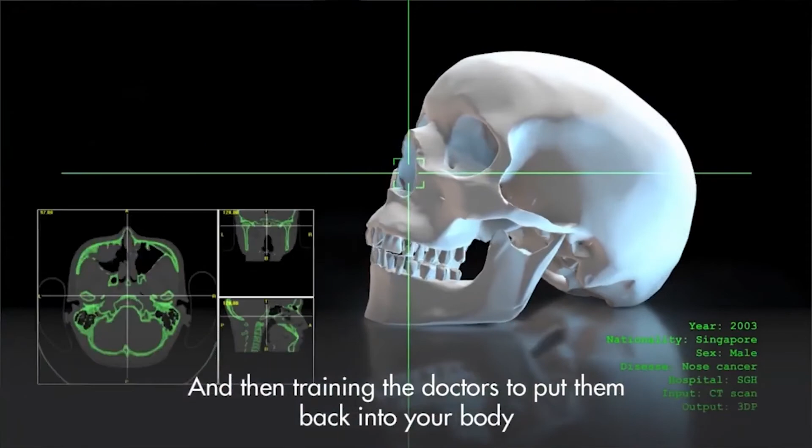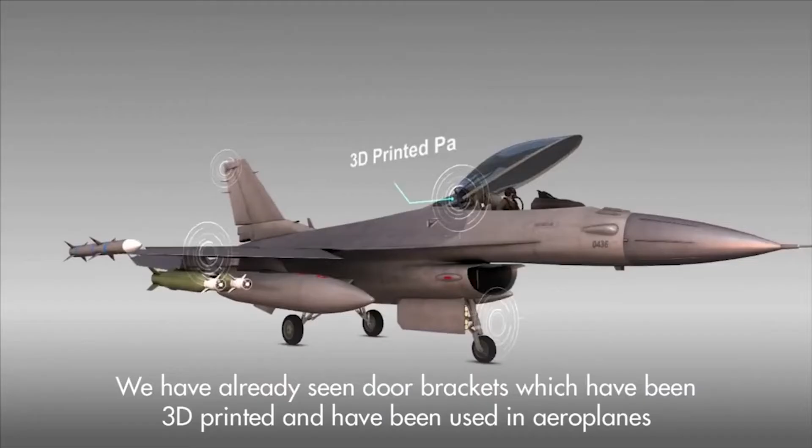AM can be used to make injection molds with conformal cooling channels, as well as low-volume customized jigs and fixtures. We have already seen door brackets which have been 3D printed and used in airplanes. We will also see fuel nozzles that will be used in aircraft engines.

So an exciting development is the development of hybrid technologies. This is a combination of both additive and subtractive-based technologies, such as milling.

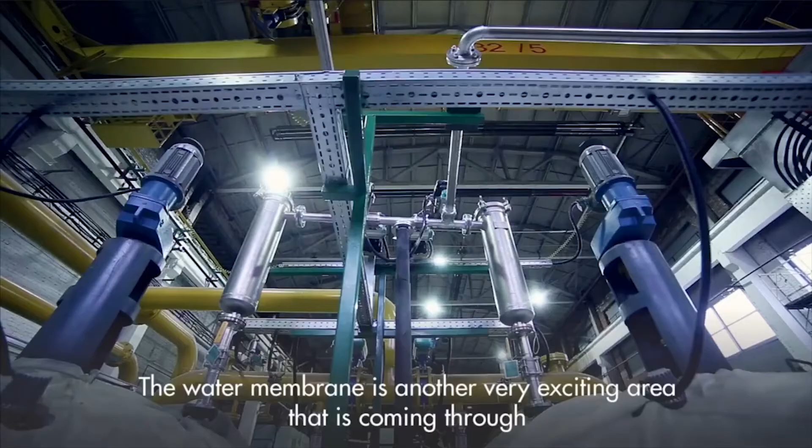Solar panel and wind turbine are some of the emerging applications with AM in the clean technology sector. The water membrane is another very exciting area that's coming through.

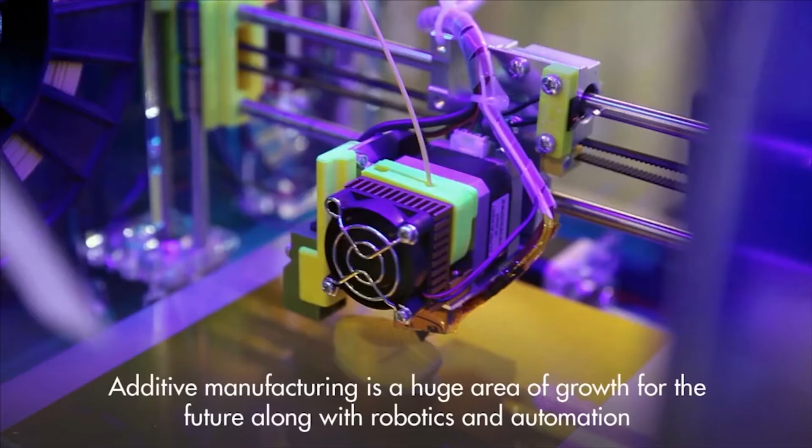Additive manufacturing is a huge area of growth for the future, along with robotics and automation. In Budget 2016, the government announced the Industry Transformation Program. Additive manufacturing, automation, sensors, analytics - these will be the enablers.

AM is identified as a disruptive technology. It has the power to impact lives, businesses, and the global economy. It is a game changer. The current market size is about 7 billion, and we should see this number triple by the year 2020 to 21 billion.

The AM ecosystem, as we see it, is made out of three main parts: universities that are training students for working in the 3D industries and do research; corporations that do prototyping work, actual parts, and scale-down models to train people; and individuals that take advantage of the fact that 3D printing can do small quantity productions.

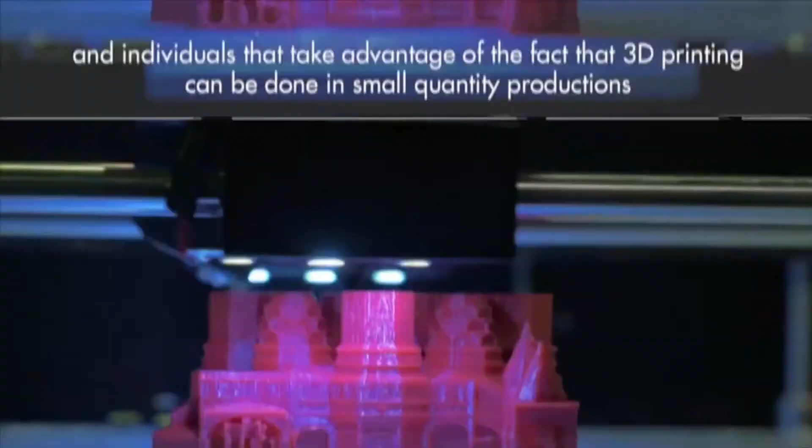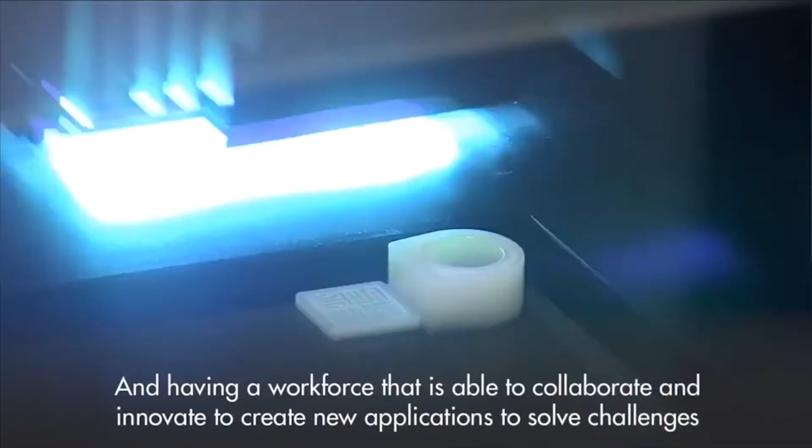It's critical selecting the right applications that are technically feasible and economically viable, then having a workforce that is able to collaborate and innovate to create new applications and solve the challenges.

We want to help companies translate their technologies into viable commercial solutions. We do this by partnerships, seeding capabilities, and skills training to position them well into the next industrial revolution. If you are interested to know more about AM and the new wave that's coming, come talk to us today.

The main mission of AAIS has been very clear from the start - that is the promotion of the aerospace industry here in Singapore.

AAIS started in very uncertain circumstances for the aviation industry. 9/11 had just happened, followed by the Gulf War and the SARS pandemic. It was during this period of uncertainty that the industry decided that we had to develop a strategy.

We had to come together, engage the various government agencies, and work out a long-term strategy for the industry here in Singapore. Embraer has decided to join AAIS to come together with all the players in the aerospace sector to harness our synergies and also to work towards the competitiveness of the industry.

Flare Dynamics is a Singapore aerospace precision engineering company. We provide business-to-business bespoke turnkey drone solutions. At Flare Dynamics, we believe that the purpose creates the machine. So for example, the Discreet Eye Micro Unmanned Aerial System is currently used in law enforcement as well as defense industries for means of tactical covert operations.

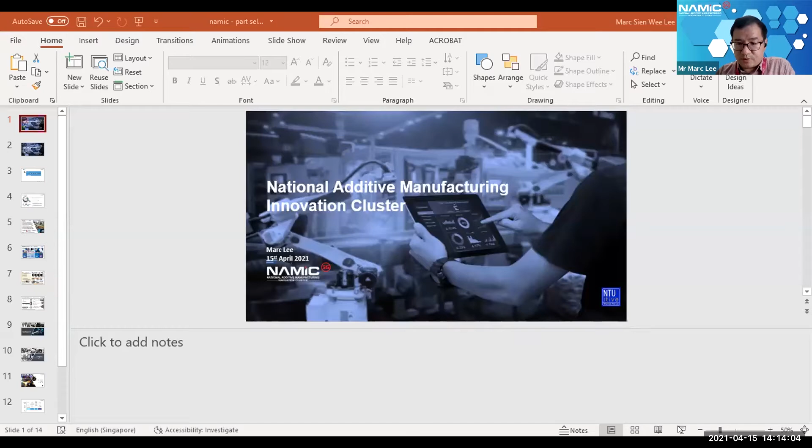All right, thank you everyone for your time this afternoon. I'm very happy to be here. Just a short introduction - I'm Marc, the commercialization manager from NAMIC, as well as the sector lead for aerospace, defense, and land transport sectors. I'll be running through a bit of our corporate deck, as well as elaborate on the new upcoming program to help enterprises in the aerospace sector.

So we have the following three agendas, as mentioned earlier, this is what we'll be running through. And a little bit of background about NAMIC.

We are the National AM Accelerator Platform funded by the National Research Foundation in partnership with EDB and Enterprise Singapore, as well as A-Star. We are hosted by NTUitive, the commercialization arm of NTU. NAMIC seeks to help industries be competitive through making various strategic plans for the future of manufacturing and pushing public-private collaborations. This is done through nurturing and expanding the AM ecosystem, creating platforms to test and implement new business models and growth, while also accelerating AM standards creation.

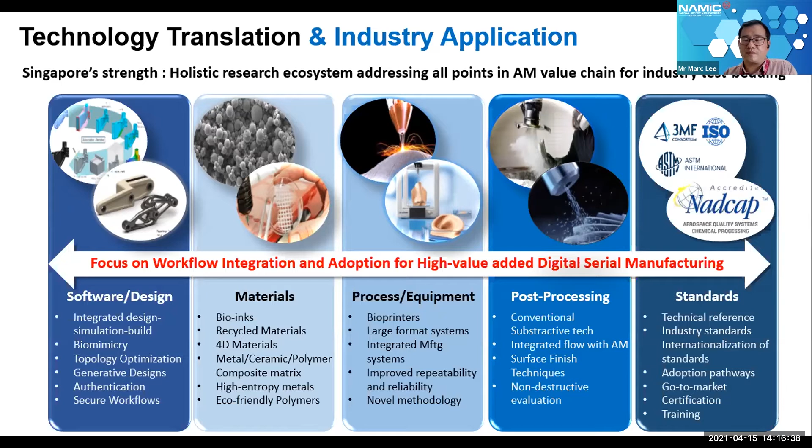It's only through standards development where the demands by the end users will increase correspondingly with the increase in the supply side of the house. So the following are some of the achievements that we have seen over our past 5 years of development.

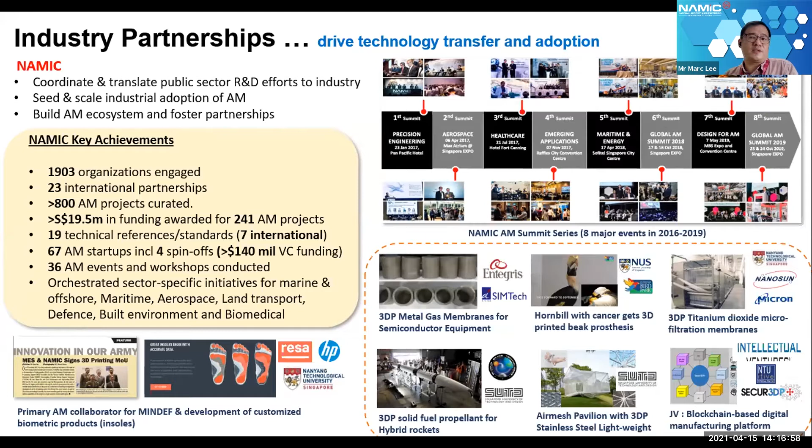NAMIC has engaged in multiple industry partnerships, and the main aim is to coordinate and translate such public sector R&D efforts into commercial applications, basically to scale up industrial adoption and to build the entire AM ecosystem.

So following are some of the AM adoptions which are gaining momentum in Singapore. On the top left, you can see some of the Sembcorp Marine parts, where they announced about 100 parts to be AM produced for vessels and offshore rigs. Ivaldi and Wilhelmsen Ship Services have announced that through AM they could reduce the lead time for spares. MPA and PSA on the Port AM facility has been an extremely successful and very encouraging response on the phase 2 of the JIP that has been announced recently.

Then on the aerospace side of the house, Collins Aerospace announced that they have an AM Center of Innovation over in Changi - that was last year. Our partners at ST Engineering have made a great achievement in gaining the EASA supplemental type certificate for AM of aircraft cabin parts. This is really credit to Dr. Cheng and her team on that.

And for Additive Flight Solutions, which is the JV between Stratasys and SIAEC, credit to Hao Nan and Stefan on achieving the AS9100D certification over in 2020.

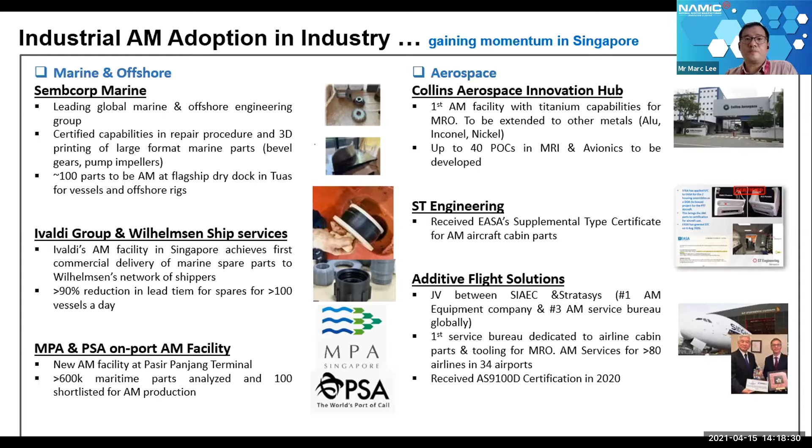So up next, I'll be doing some elaboration on examples of AM that's been applied in the end use, especially in the aerospace sector.

I'm taking a leaf from the recent announcement from Boom Supersonic. NAMIC was not involved in this project, but I think there are some very valuable points to the future of aerospace engineering and aviation travel.

Boom is a commercial company. They aim to put supersonic jet consumer flight back into business again, ultimately scheduling commercial supersonic travel by the end of the decade. The jet will be called Overture, featuring a carbon composite airframe with very efficient Rolls-Royce jet engines, where afterburners are not used during supersonic cruise. This is quite a feat.

Recently they announced the successful launch of the XB1, back in October 2020. The platform allows designers to explore numerous advanced design and manufacturing technologies other than legacy ones, and AM or additive manufacturing could produce most, if not all, of these very complex parts.

The XB1 actually has a total of 340 unique 3D printed parts, and the combined weight reduction from this is extremely substantial.

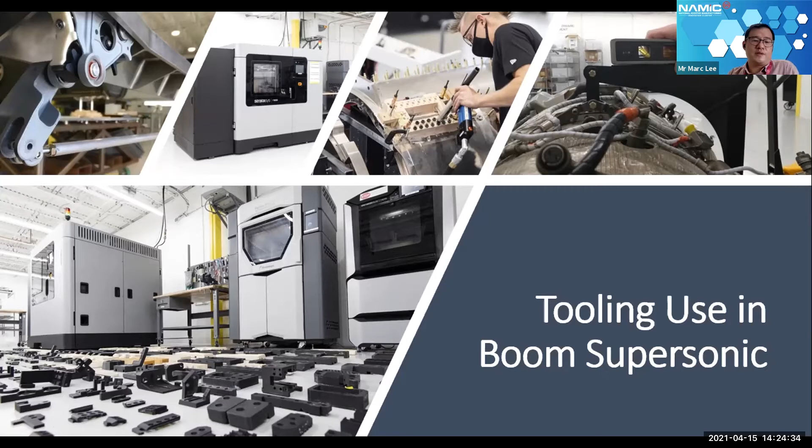On the top left, if you're able to see that photograph, let me see if I could zoom in.

On the top left, you can see the 3D printed prototype latch mechanism for the canopy opening. This is to ensure that the kinematics actually meet the specifications.

In the middle, we see the engineer drilling into the fuselage using 3D printed drill blocks as templates, and this greatly reduces the assembly time.

The last picture on the right shows a jig being produced to check the fitting of the entire engine. This is one of many iterations engineers use to ensure correct fitting, rather than figuring out how to assemble it properly into the fuselage of the aircraft.

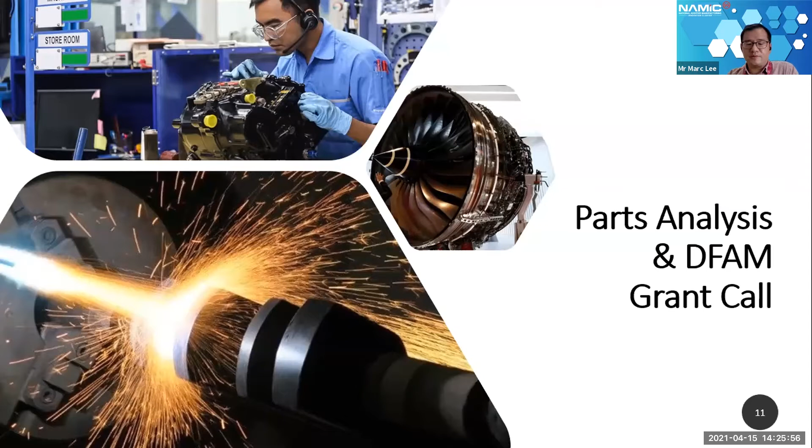Next I will touch on the parts analysis and design for AM grant call. The program will have 2 phases for the open grant call for part selection. The main goal is for small and medium enterprises to experience AM and to be equipped with this added value and skill set, to help in operations, be it for toolings or end-use parts.

The grant call will start in June, where interested SME companies can come forward with their list of parts which they intend to have 3D printed. We will be working with the NAMIC hub teams at the 3 STEM universities, NUS, NTU, and SUTD. The technical teams will use software to analyze these parts to assess printability.

Once the parts have been analyzed, they will move to phase 2. The SMEs will work with a 3D printing service bureau to get the parts analyzed on total process costs, from printing costs to post-processing, and performing market surveys on part demands and possible processes and options. Phase 2 will be co-funded by Enterprise Singapore.

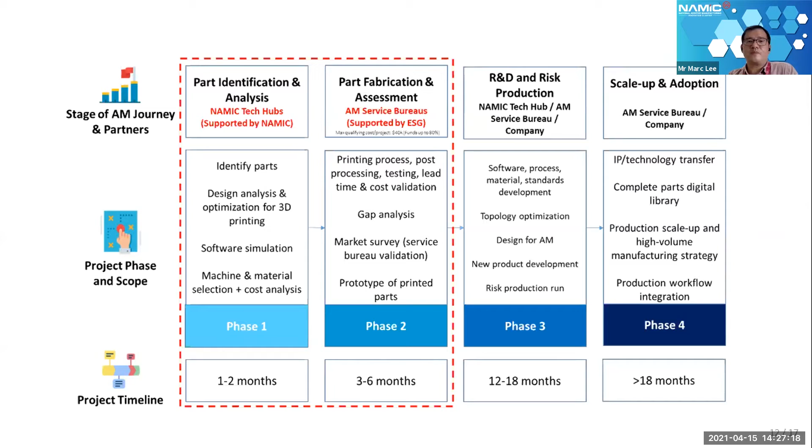Some details on the grant application: the main applicant for the grant will need to be a local SME with a legal entity and presence in Singapore of enterprise size. All of the work will be performed in Singapore.

In phase one, the work will be supported solely by the NAMIC Technology Hubs at the 3 STEM universities. In phase two, it will be co-supported by Enterprise Singapore through the EDG scheme. The end user company will be the lead applicant, and the total qualifying cost will be kept at 40,000 per project.

If the proposal is submitted before 31st March 2022, up to 80% funding will be available. If it's beyond 31st March 2022, it will be 70% of the qualifying cost defrayed by EDG.

Applications will open on 1st June 2021, and all applications will close by 30th June 2022. Proposals are to be submitted through the NAMIC info email. For clarifications on the program, you could contact my colleague, Ms. Tan Hui Chi, at the email below. You are also able to contact our colleague at Enterprise Singapore regarding the EDG grant in detail. So with that, I come to the end of my presentation, and thank you everyone.

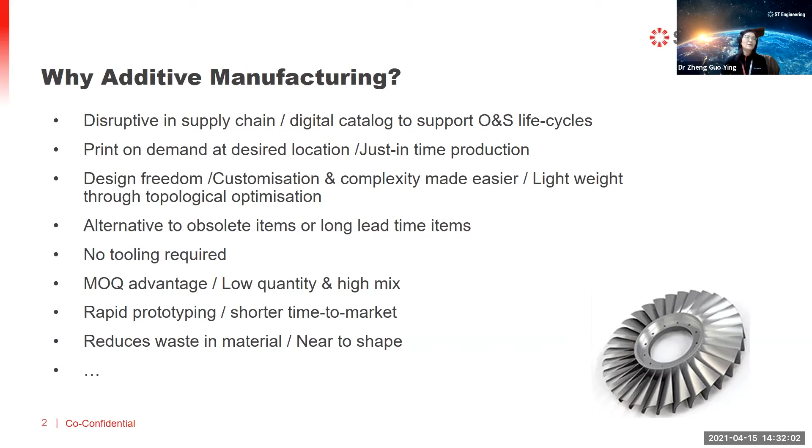The value proposition is very attractive. It's a long list, I'm not going to read through every line. I just want to highlight the commonly perceived disruption brought by additive manufacturing, especially in supply chain, which breaks the current way of doing it. However, we can do it just by printing the digital file from the cloud anywhere in the world and at any time when we need it. So that's the huge change in the current supply chain.

So how can we realize this kind of value proposition in our real world application? With this desire, we started our journey in 2015. We purchased industry-grade printers, and after that we started to look into how do we do certification. In 2017, we obtained EASA certification with the authorization to print tertiary parts. So we expanded our DOA and POA into that area by doing such work on the FDM machine.

With that, we started our journey and printed our first part, making its first appearance in the aircraft operation environment. This started with an issue shared by our customer: there's a very frequent break of parts, even during installation. With our engineering knowledge, we understood where the root cause was. We eliminated the manufacturing constraints posed by the previous manufacturing method. Instead, we used the additive manufacturing advantage to change the features which caused the stress concentration that eventually led to the break. With this, we were able to bring down the previous stress to less than half.

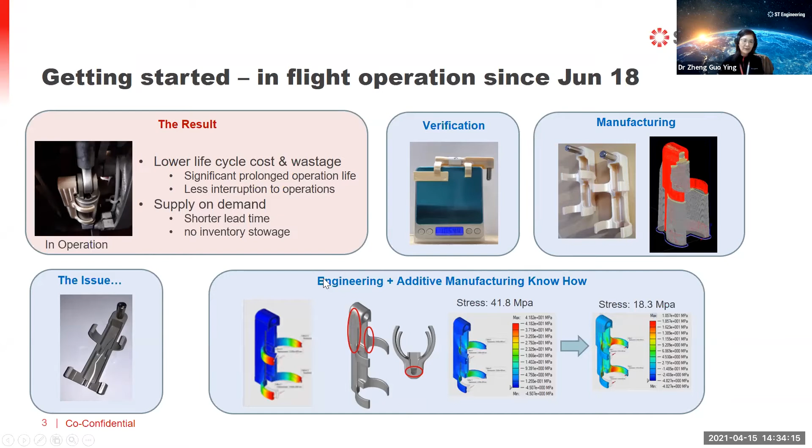On the operational side, additive manufacturing has already presented the advantage as an alternative solution to obsolete parts, long lead time parts, so which is able to rapidly supply on demand. It's a big advantage to operational support.

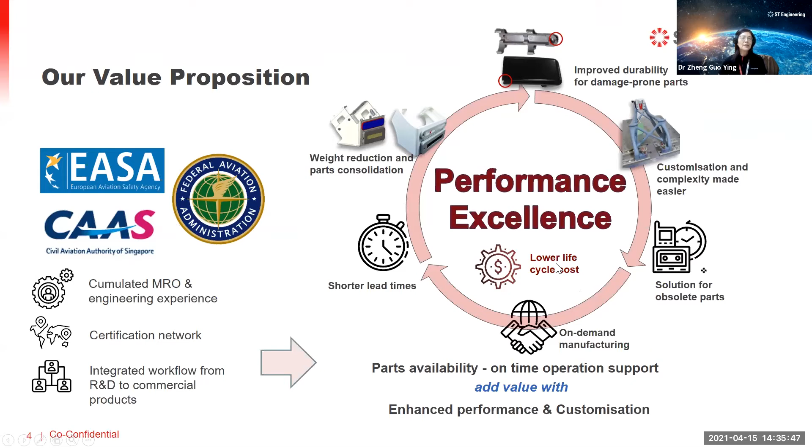So this value add is built through our engineering expertise, accumulated not only through MRO services but also our engineering R&D experiences. Together with our certification framework, we are able to attain EASA, CAAS, as well as FAA certification. This allows us to provide a solution to our customers for their performance excellence.

So today, in terms of hardware and system capabilities, we already have 3 systems which have been qualified and accepted by EASA and CAAS. We have metal solutions, we have polymer solutions by powder as well as filament. In the pipeline, we are looking into the largest powder fusion system for metal printing, as well as open source FDM solutions, which give us variety and opportunity for low-cost printing to benefit our customers.

All these capabilities are underpinned by our engineering capabilities, where we have created proprietary process specifications for the various AM processes, which are already accepted by EASA, CAAS, as well as FAA. We also created procedures to control design and production interfaces to ensure quality assurance has been achieved. We also acquired our software suite, which enables us to do reverse engineering, design, topology optimization, all the way to printing design.

So we are able to control the printing file in the cloud. Whichever qualified vendor, they can just download the printing file and directly print it, as featured in the video. Behind this, we also integrate the workflow from R&D all the way to commercial product. This is to gauge the evolving of AM development, as well as market acceptance.

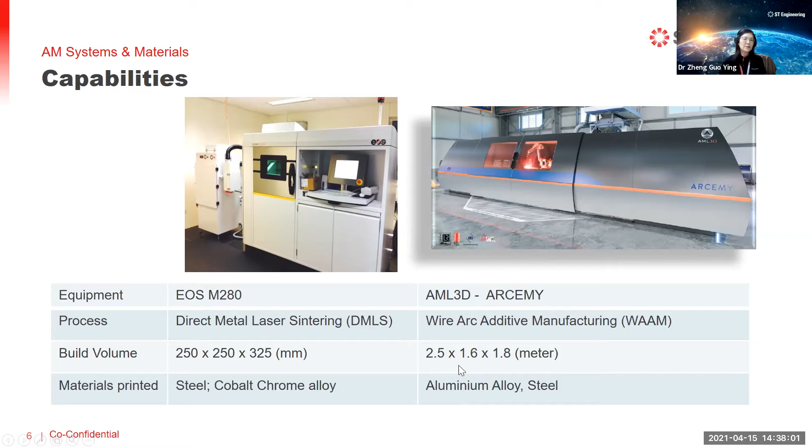Beside aerospace grades, in our family we also have two other machines. One is the powder bed fusion, EOS M280, printing different materials, where we're printing the Pratt & Whitney flange. The other one is the WAAM machine, which is able to print very large parts, up to 2.5 meters. Currently we are printing aluminum alloy and steel.

After that is the printing element. We need to understand how to print it, not only for the performance, but also for economics. Then from there, we carry out the post-processing, finish the parts as customer desired. Finally, we do the verification and certification together to bring the parts to the aircraft. So this basically consists of three big elements: the design portion, the production process, as well as the post-process plus the part certification.

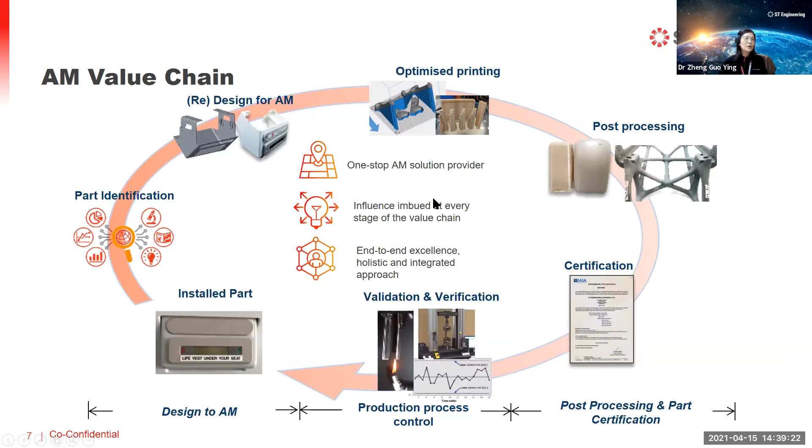So with this kind of capabilities, we are able to serve our customer as one-stop solution. Obviously, this cannot do without our supply chain. I'm going to mention about collaborators later. So today we have obtained the EASA certification, as Mark mentioned, which is the supplemental type certificate for aircraft parts, as well as FAA PMA certification for cabin parts.

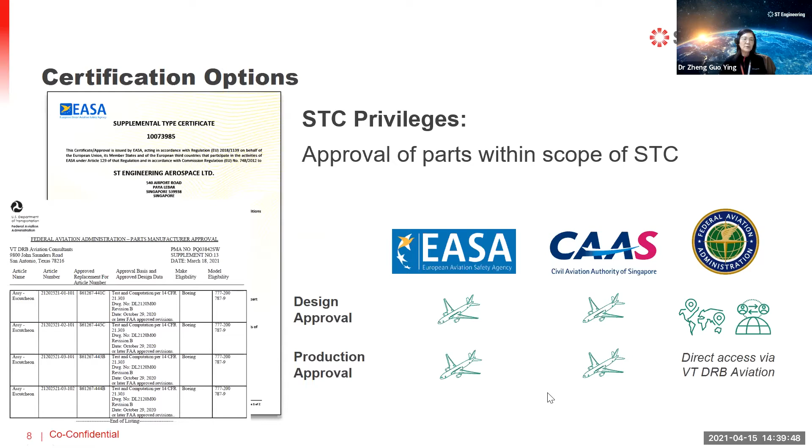So looking forward, we are adding more capabilities, besides the machines already mentioned. We also look into repair capabilities and more materials and more process capabilities, which allow us to provide cost-effective solutions as well as more critical parts.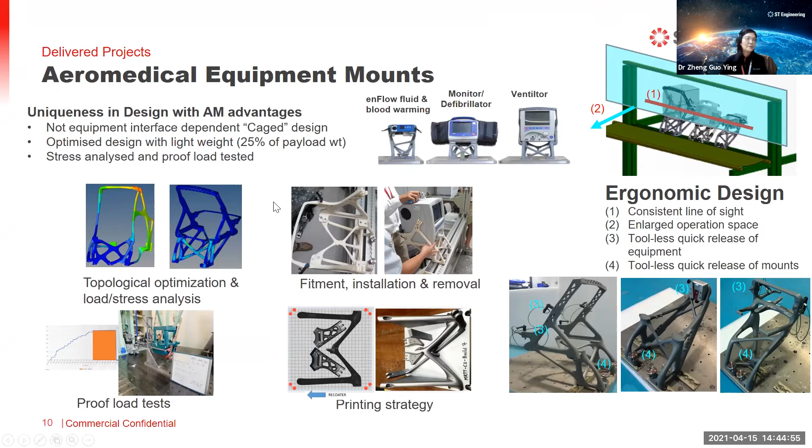The next one I want to introduce is a cabin part certified by the FAA PMA. This part started with an issue - you can see it's a frequently breaking part. With our knowledge, we understood the issue. We kept the exterior look identical, however we changed the internal design. By this change, the stress level dropped from 50-something megapascal to 20-something megapascal, a significant improvement of the durability of the part.

Then after that, we studied how to print it, because this armrest has direct contact with passengers, which has direct impact on the airline's image. So we studied different orientations without compromising part performance. Finally, we selected one of them.

As Mark shared before, we also use 3D printing to create jigs for quality control. Such parts have very complex contours, very difficult to do physical measurements. So we use 3D printed tools to check quality, ensuring consistency and meeting the customer's requirements. This picture shows the certification test using abuse loads as per the requirement.

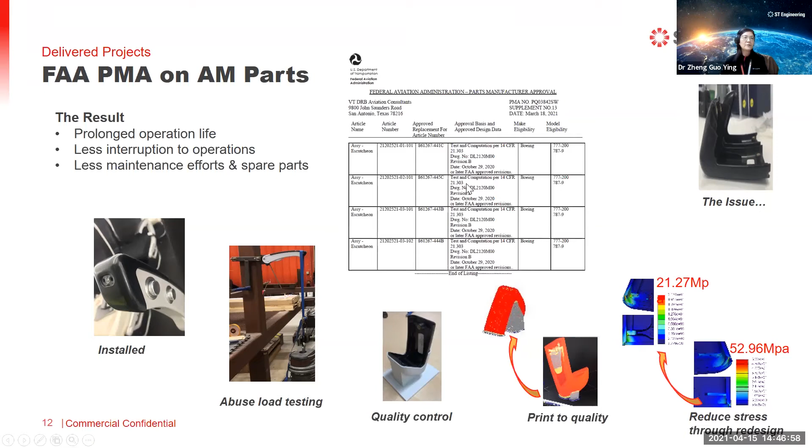I hope these examples give you some ideas how parts can be turned into value-add AM parts. I would like to mention our collaborators.

Previously I mentioned NAMIC - we are continually working with NAMIC. I would also like to acknowledge NYP, Nanyang Polytechnic, as well as NUS, who are the collaborators helping us achieve the EASA STC results.

We also have other collaborators. Right now we discuss with A-Star for our ICP project to bring our capabilities to the next level. This is not enough - we also need to work with our OEMs and collaborators to understand their machines to maximize the advantage in our applications.

Other than that, material is another very important aspect. So we also work with material OEMs to look into how we can bring more value-add materials to our customers.

Again, in order to complete the AM value chain, we need a strong supply chain, which mainly consists of local SMEs. I have listed some of them here - this is not all of them. We are looking forward to working with them continuously to bring our combined capability to the next level.

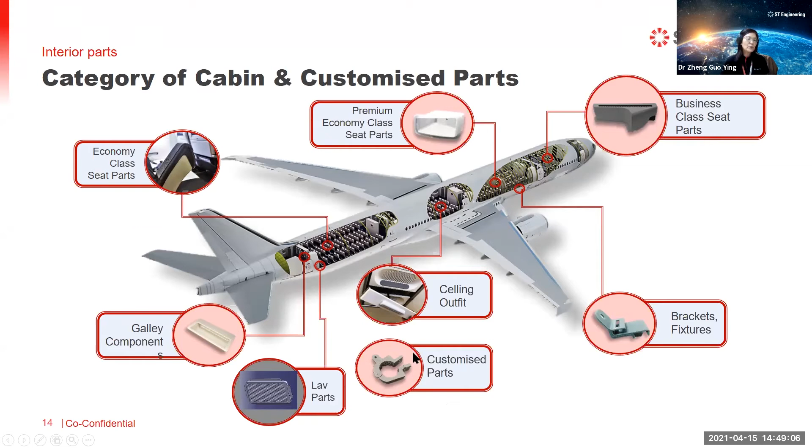For freighter aircraft, the issue will be different, because when an aircraft is converted to a freighter aircraft, it already has certain age, which implies obsolete parts could be a potential issue. Here are examples where we use AM to tackle obsolete part issues, for example exit signs, for example cargo door covers. This can be quite handy - with very short lead time we are able to deliver them.

In other areas, this is the housing example which we were awarded the EASA STC for. We also have covers, like a lower complicated shape - the original part is made from many parts, each strip being a sheet metal part, assembled with many rivets. Whereas in our solution, we just put it into one.

We did not forget the lower hanging fruit, which is the tools, jigs, mock-ups, and prototypes, where we don't have to do certification. These are very quick turnaround projects. Here I feature a few. One of them is a complicated jig - you can see it's very complicated. This kind of jig is used for high precision cutting on a complex contoured surface for sophisticated modifications.

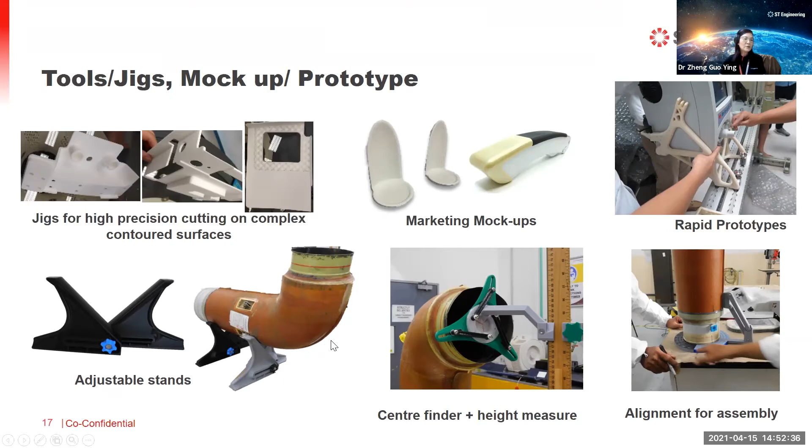We are very grateful to see our customers and collaborators give us encouragement from the open source. So I just listed some over here - these are the jobs we accomplished with our various collaborators and customers.

I would like to thank my team as well. No matter how good the machine is, no matter how good the process is, without people we can't do anything, we can't move anywhere. My team is just 6 of them together with me. However, we are doing a big range of work. I have to say that within the ST Engineering family, we are very fortunate - we have many people to support us, from the certification framework to the production team, to the quality assurance team, as well as our MRO frontier team around the world.

So they give us all the feedback on what needs to be done and what customers are looking for. Of course, we never forget our collaborators who supported us all the way. We are looking forward to working with all of them, continuing our journey.

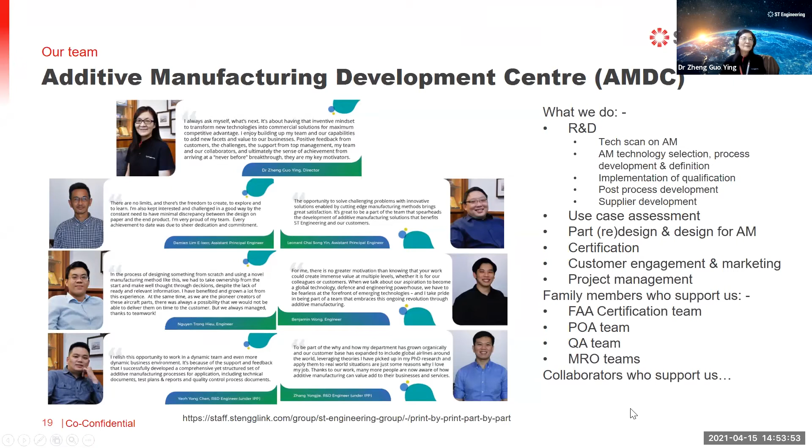Now, we actually have a certain product range to be used for aircraft. We also have certain capabilities to work with any of you. If you have any needs, we have the website, as I mentioned earlier - please visit it to find out more details. You're welcome anytime to approach us with whichever problems or questions you may have. No obligation. Looking forward to working with all of you to build our combined capability. With this, I would like to thank you for your attention.

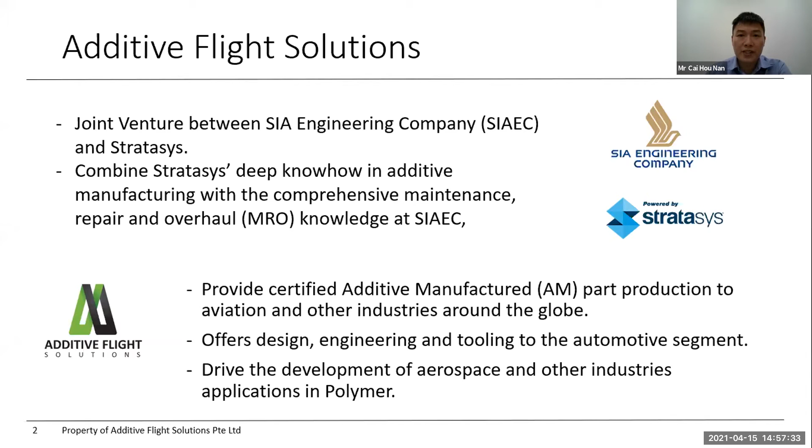So, okay, this is just a quick overview of AFS. We are based at Loyang, which is near the aerospace cluster. So we focus on aerospace, MRO, and industries. But however, over the last few months, we have pivoted away to the other industries based on the applications available.

So our platform for building is currently focused on the FDM technology, utilizing the Fortus 450. We have just received our Fortus F900 and are in preparation to induct it. Besides that, we have access to approximately 200 AM machines via the Stratasys Partner Network.

So in terms of certification, we are leveraging on SIAEC's EASA Part 21 approval for POA and DOA. As for AFS itself, we are certified to ISO 9001 and AS9100.

Our equipment consists of the FDM printers, as shown on the left, the F450 and F900. In terms of quality control, there's a strong emphasis on post-production, production tolerances and measurement services. We've actually invested in a GOM scanner.

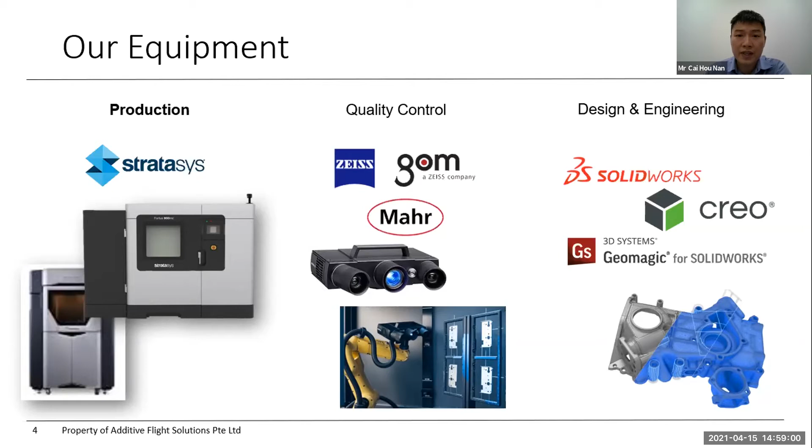And in terms of design engineering, these are the topology optimization software that we currently use. Of course, these are at the moment, and we are actually getting whatever is satisfying our requirements in the market.

As we mentioned earlier, based on worldwide experience, we do find that there is a lot of materials and technology that are suitable for a lot of applications that have not really taken off in Singapore in terms of industrial requirements yet. But we do feel that after we brought this in and visited a few of the aerospace companies and MROs, there is a great demand for these materials for their tooling, jigs and fixture needs in their market.

So of course, our bread and butter is in certified aerospace cabin parts production. That's why our Ultem 9085 is the certified aerospace material that we have used to print cabin parts for the Singapore Airlines Group. So actually, since incorporation from 2018 to current, we have printed more than 5,000 cabin parts that are flying. There will be some use cases later.

So however, as we have seen, because of the pandemic and also because of the opportunities available, we have also focused a bit more on toolings for the MRO industry. But these toolings are not just limited to aerospace MROs. They are also applicable to other industrial applications which we have seen, and we will expand a bit later.

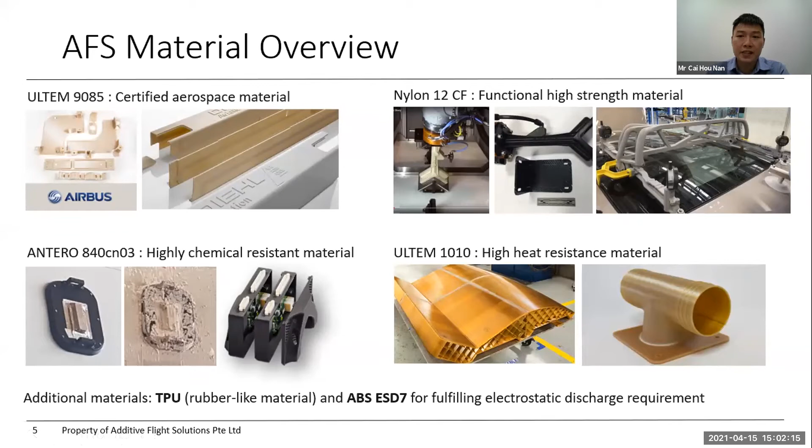As mentioned earlier, we will touch a little bit on cabin parts, but now we will focus more on tooling and engineering.

In some of the MRO shops we visited in terms of avionics and electrical components, a lot of ESD materials are required. This is available in our range of materials under the ABS ESD materials, for applications such as cable routing or customized covers for test boxes on the old Boeing 747 fleet platform. A lot of opportunities are present in using the ABS ESD material on these covers and cable routing, which provides good product ergonomic and performance improvement support.

As mentioned earlier, for the window masking, there is also an integrated use of the hard mask with handles and even vacuum suction incorporated as a tooling solution. That's the end product, but the initial stages that complement the AM are actually the scanning of the profile of the window and manufacturing of these prototypes for testing.

Besides the 3D printing material, we also have a target frame, which is all 3D printed using the aerospace material, as a target frame for optical scanning. As we all know, for aviation parts, for precise measurement, we do not want to have reference marker stickers all over the parts. That will be an issue if they're not removed entirely, or it may affect the part quality itself at the end if it's not done properly.

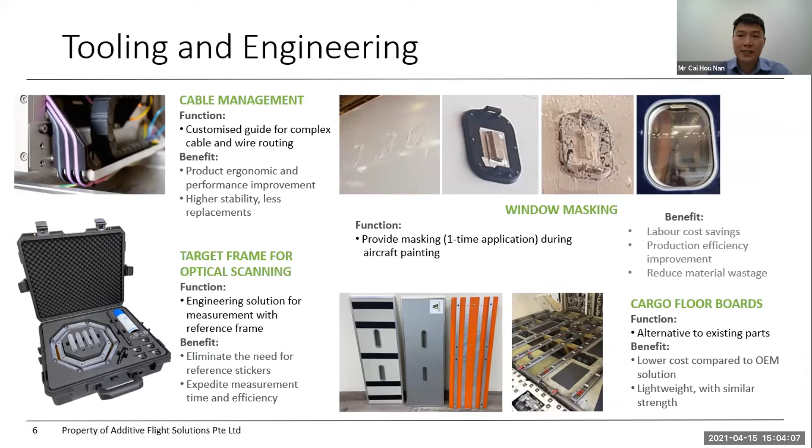So with a reference frame, we're actually able to perform accurate and precise scanning for the parts. These are in-house designs that we have come up with utilizing the AM technology and know-how.

Besides the parts on the aircraft itself or the engine shops, we found there is a huge demand for specific engine covers. These covers come in various forms and geometry that used to be done with a traditional canvas sheet. Now this provides customized protection to various engine sections without having a very large footprint on the whole workable area. It also allows different portions of the engine to be protected when other sections are being worked on. So the advantages are that these are highly customizable, there's no minimum order quantity, and we're able to integrate functionality in a simple design.

As mentioned earlier, we've also been doing a few plasma masking applications for the engine shops using the Ultem 1010 customized material for engine cross-sectional areas. And also for wheel paint masking, we use our own ABS material, but with TPU rubber masking as an integrated solution to seal up the tight spots and prevent any paint seepage.

This also overlaps with what Mark has shared earlier. In terms of toolings, drill jigs and guides, it is widely used overseas in terms of the Ultem material for the trim guides. We do not see this as much in the current Singapore application context, as we probably do not go very deeply into manufacturing of aircraft fuselage or structural parts, but this could potentially be used in other industries where there is demand for structural assembly and production.

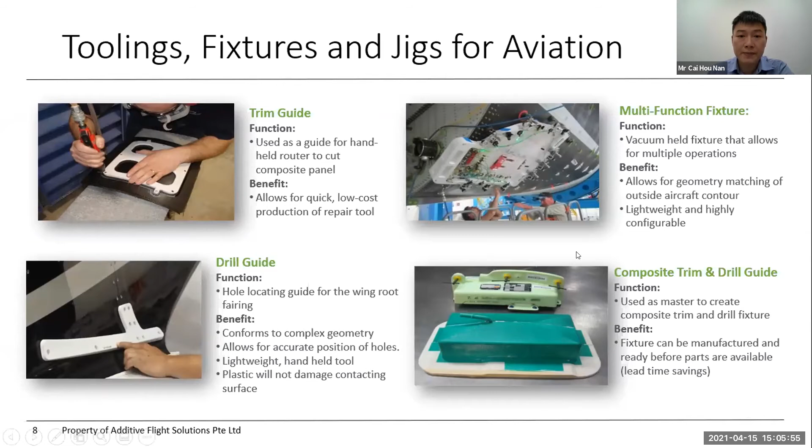So besides the structural parts, as mentioned earlier, in terms of automotive industry, there are also alignment jigs being printed in nylon 12 carbon fiber. This is what we usually bring around in our various shop and production floor visits to show that the material itself is a lot different from what we've imagined polymer 3D printed material can look and feel like.

Of course, for end-of-arm solutions for robotics, we have grippers using nylon 12 carbon fiber. The benefits are 40% lower weight, higher stability due to the nylon 12 carbon fiber, and in some applications where there are metallic surfaces, the plastic material grippers will not damage the contacting surface. This is an expansion on the customized engine covers, where in areas difficult to access, we can print 4 to 6 different subsections of the cover, and have an integrated solution for grippers on the roll bars for the engine section tools.

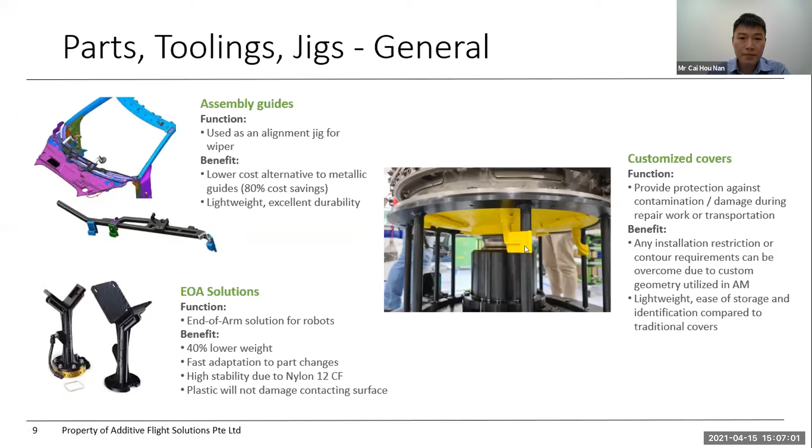So now let's touch briefly on certified parts production. As Dr. Zheng mentioned earlier, the main priority in terms of AM is not just reproduction of existing parts, but also adding strength to the original part. For example, in the cocktail tray replacement, there's some strengthener used in the joints when we print it, which improves the reliability.

And also for aircraft safety devices, these are not standard parts but in addition to OEM requirements - the airline has a requirement for additional safety tools on the ground to prevent inadvertent deployment of slides. So these are safety features: door handles, covers that can be used to prevent the handles from being rotated.

Finally, in terms of the COVID situation where repatriation flights needed to be carried out, there was also demand for sanitizer holders, and we had this from design to certification to parts production within 2 weeks. This was an alleviation from any global supply chain shortage.

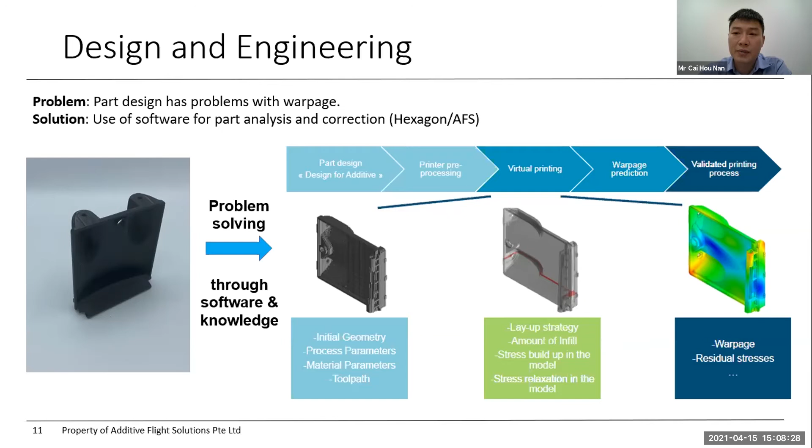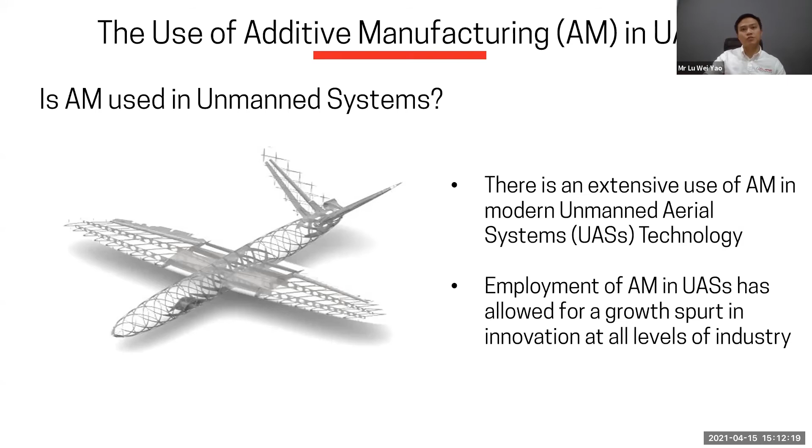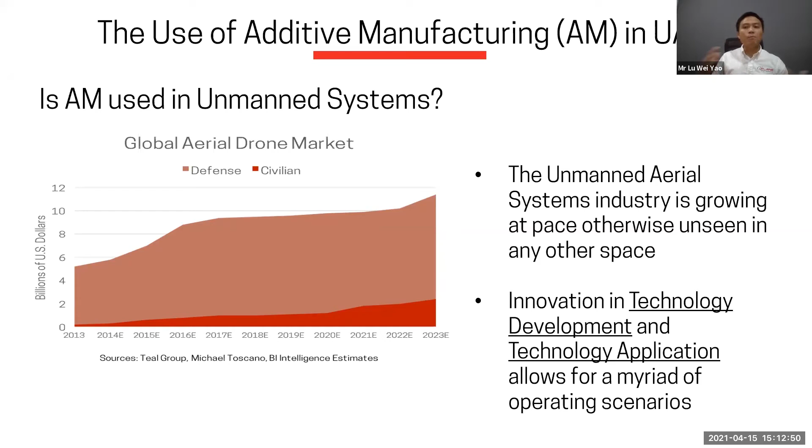Just by judging the graph on the left, it shows both the defense and civilian global aerial drone market all the way to 2023, in billions of dollars. You can see there's a huge market opportunity right there. The unmanned aerial systems industry is growing at a pace unseen in any other space, and innovation in technology development as well as technology application allows for a myriad of different operating scenarios.

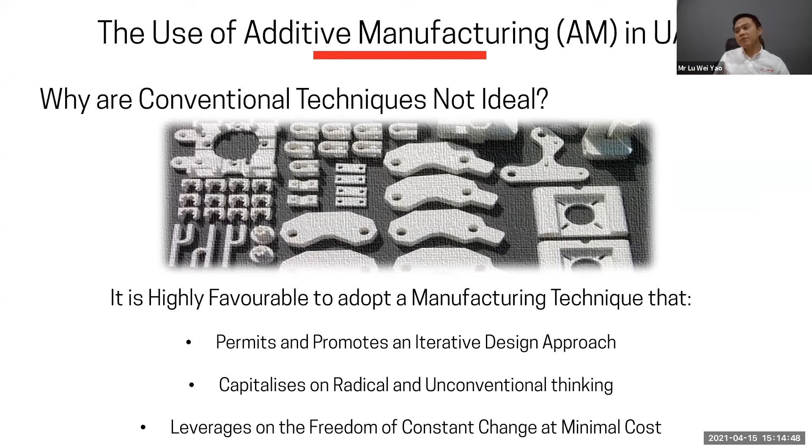So it's highly favorable to adopt a manufacturing technique that, number one, permits and promotes an iterative design approach; number two, capitalizes on radical and unconventional thinking; and number three, leverages the freedom of constant change at a minimal cost. These three things are crucial in order to design a product that is customer-centric, almost.

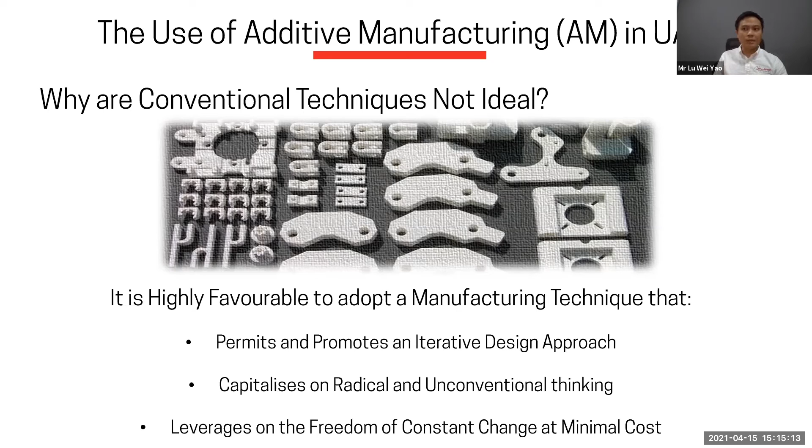So additive manufacturing promotes innovation. We at Flare Dynamics feel there's no two ways about it. Innovation is key, especially for a technology company, be it disruptive technology to begin with. The pace at which things move is extremely fast, so innovation is key to provide that distinctive edge.

So why is AM important? We can see things from two different perspectives: the managerial perspective and the engineering perspective. From the managerial perspective, it's ideal that there's minimal cost impact for design iterations even after the initial prototype has been produced. If we were to employ standard or conventional manufacturing techniques, modifications to mold design and production of a new mold are extremely cost intensive. Additive manufacturing basically eliminates that entire process by allowing a lot of change with not a lot of money, which is very crucial.

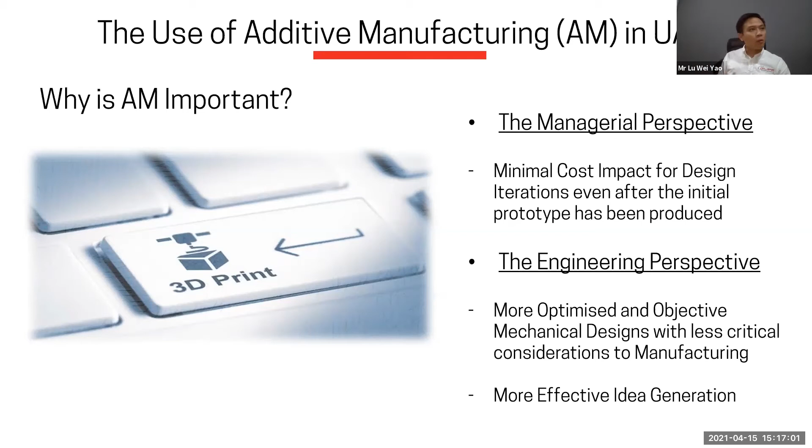Coming from the engineering perspective, more optimized and objective mechanical designs with less critical consideration to manufacturing can be considered, in the sense that we do not need to consider the limitations of conventional manufacturing techniques, but rather have a more objective-driven design approach, more optimized for weight reduction, strength-to-weight ratio, or other things I will cover shortly. And of course, AM allows for a more effective idea generation process.

Additive manufacturing provides a whole new dynamic between three elements: designers, manufacturers, and end customers. Designers are better able to design components or products with customers in mind, and manufacturers are better able to produce these sometimes unorthodox designs, because AM allows you to do so by reducing the effort needed for design alteration and production of a customized solution.

A service bureau we work very closely with is Additive 3D Asia, a professional AM service bureau based in Singapore that provides FDM, SLS, MJF, and more. We work with them closely, and they facilitate industries in automotive, aerospace, engineering, even production of spare parts in shipping and marine.

The uploading of parts and parts assessment workflow is extremely efficient, I would say. Special shout out to Jason and Pauline at Additive 3D Asia for being able to meet some of our extremely stringent requirements sometimes.

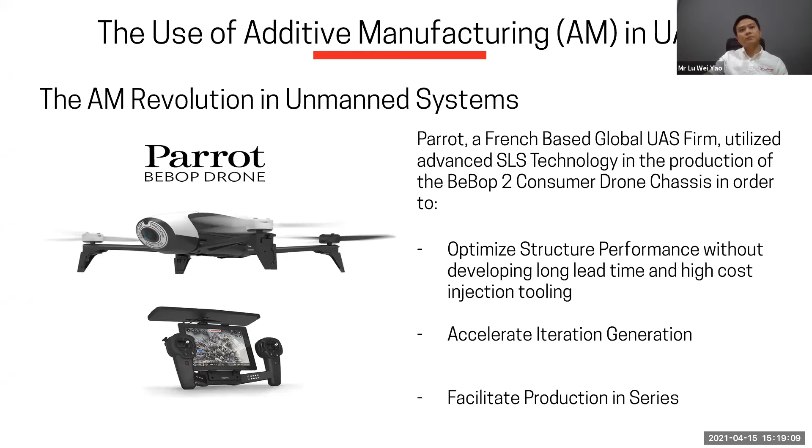Now, bringing things a bit closer to home, this is a case study on the challenges and solutions in creating the Discrete-i Mark III micro UAS, which is a product of Flare Dynamics.

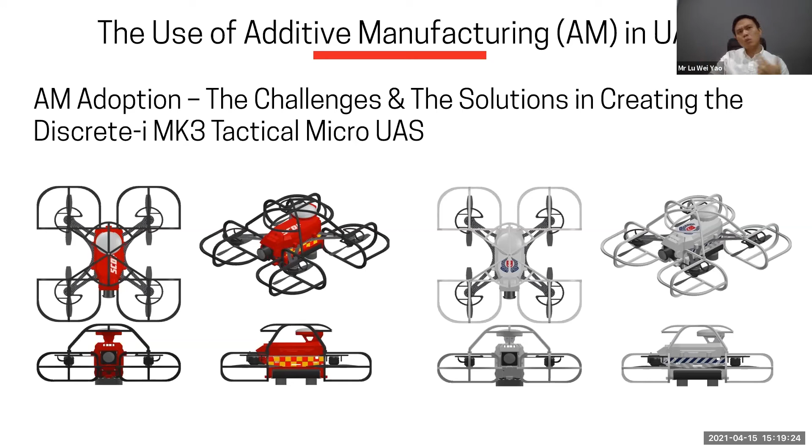What exactly is the Mark III, the Discrete-i Mark III? It's an ultra lightweight tactical micro unmanned aerial system, about the size of your palm, weighing about 250 grams. What exactly is 250 grams? If you go home, just before you brush your teeth tonight, take out a brand new tube of toothpaste - that's 250 grams. I'm assuming we all use Colgate or something along that line, but that's about 250 grams.

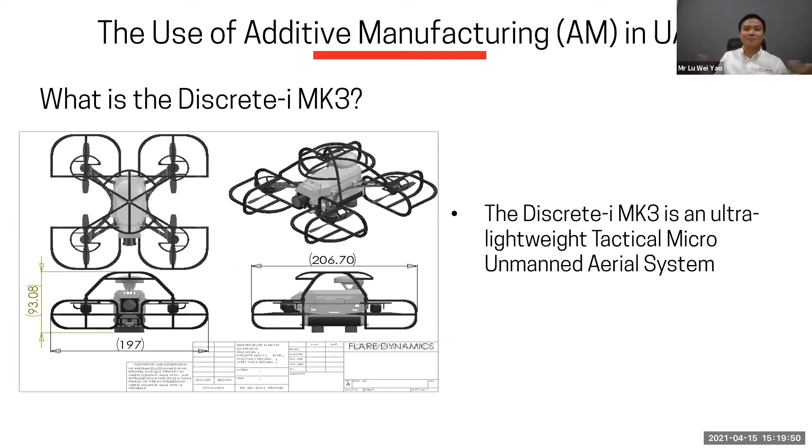The Discrete-i is normally deployed in close range tactical engagement scenarios, or what we call CRATES, where immediate intelligence, surveillance, and reconnaissance, or ISR, is required.

Some of the challenges and solutions in creating the Discrete-i Mark III can be subdivided into both engineering and organizational. Let's look at engineering first - we have dimensions we have to pay a lot of attention to. Weight is of paramount importance in any drone.

Impact absorption, which I will share a bit more later, the strength to weight ratio of our components, as well as the material properties of the material selected - by considering all of these elements, we resulted in a concept that we need to employ a performance optimized design in order to achieve what we want with our end product.

Moving over to the organizational consideration, we identified that we needed a user-oriented design approach, because of the end users and how we can facilitate their growth together with Flare Dynamics. There was a requirement for initial low rate production in the beginning stages to identify some of the requirements of our customers, and a need for a phase-to-phase iteration approach, whereby after the first phase there might be requirements to modify or enhance the design. So from the organizational perspective, we identified that we needed a very customized low-rate production approach.

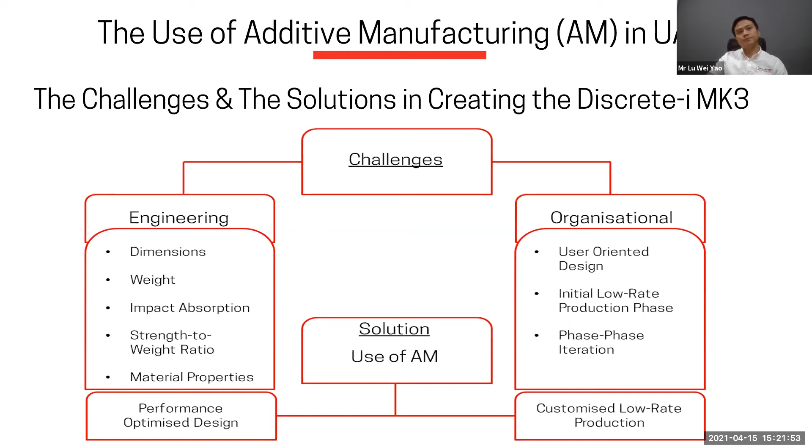Let's look at the size requirement of the Discrete-i. As mentioned, the size is about the size of your palm - it is a micro-sized platform in order for it to be tactical and easily deployable. As the name suggests, the smaller the aircraft, the more likely it is to be discrete. That was the design intention.

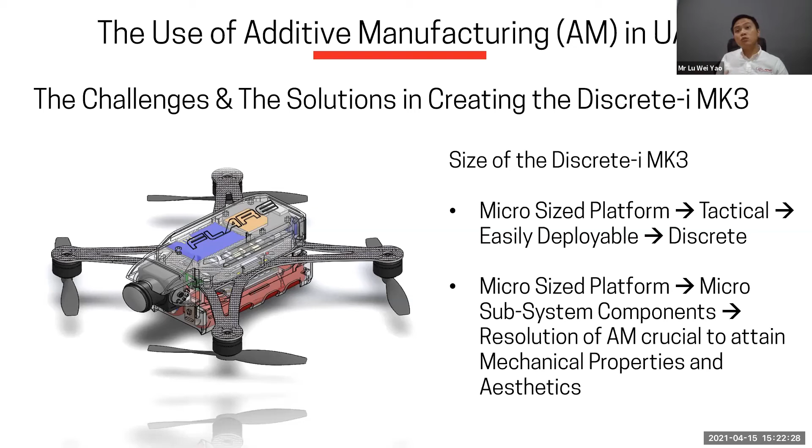Another thing we needed to consider is that a micro-sized platform has micro-sized subsystem components, be it electronics for navigation or for power distribution, and so forth. So the resolution of AM is really crucial to attain these mechanical properties as well as aesthetics.

Moving on to the weight consideration, the all-up weight of the Discrete-i is about 250 grams. This ultra lightweight platform was designed because anything under 250 grams, coupled with the safety cage structure I'll showcase later, poses no threat to personnel safety on the ground. So the additive manufacturing design and material must cater to these weight optimizations, because it was a stringent requirement to keep the entire aircraft under 250 grams, which is an extremely tall order.

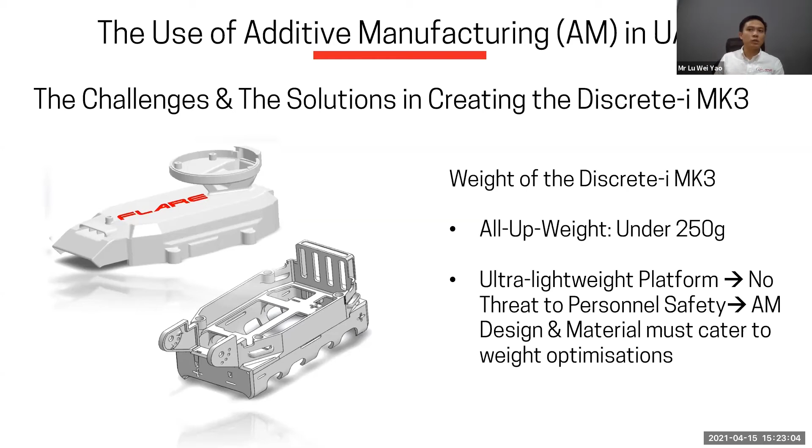Now, the impact absorption characteristics of the Discrete-i is what sets it aside from a lot of other drones of the same size or capability. The Discrete-i system has an exoskeletal impact-safe shroud system. Basically, coupled with the 250 gram all-up weight, the aircraft can drop out of the sky onto an individual and have no threat to personnel safety whatsoever.

So the AM design and material must cater to that rigidity yet flexibility ratio. This is something that has to be considered in order to get a rigid structure for good flight characteristics, but still be flexible enough to take in the shocks of an impact.

So the incorporation of enhanced cross-sectional designs to attain rigidity and flexibility was employed. As we move along the different cross-sections of the entire exoskeleton, there's actually a variation of the cross-sectional types and directions. This was done to really maximize the weight reduction of the entire assembly. Additive manufacturing was the only thing that permitted us to build in multiple directions.

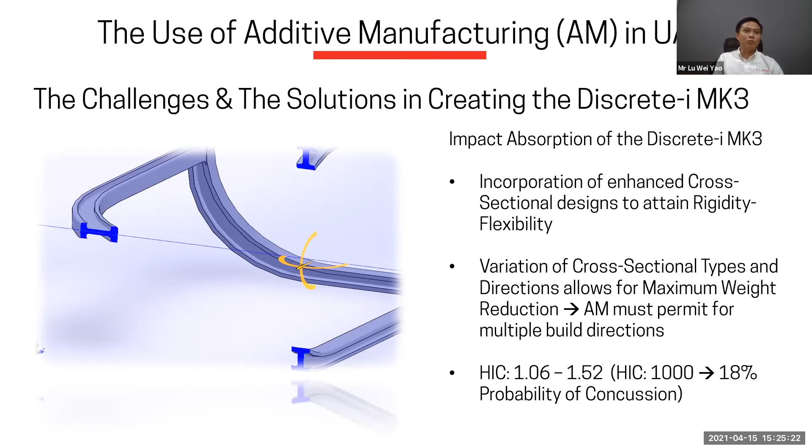Now, how safe is the Discrete-i? Just to give you some quantification of values, in front of you you'll see a term called HIC, which stands for Head Impact Criterion. For you to get an 18% probability of any form of concussion, the HIC has to be 1,000. The Discrete-i, through our analysis and empirical study, has an HIC of anything between 1.06 to 1.52. So it's literally a fraction of what you could probably get from a concussion, which is 1,000.

Now, the strength to weight ratio is crucial for the Discrete-i as well. All components are designed with weight reduction as the primary emphasis. Weight optimized designs do not permit the use of conventional manufacturing, and non-injection-molding-friendly features such as undercuts, deep drawn sections, internal voids, and varying wall thicknesses are all employed — things that only AM allows for manufacturing.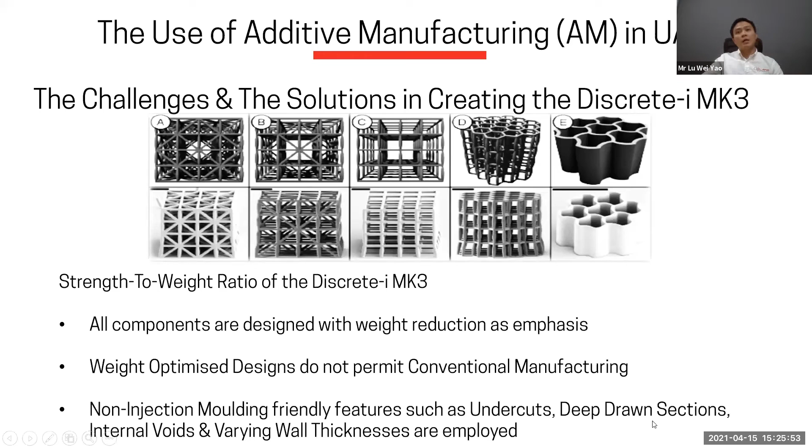So what challenges are still present? Well, AM material mechanical properties, depending on the material and manufacturing technique, still have certain shortcomings when compared to injection molding. If you don't get the manufacturing techniques right or tuned, you do have the chance of deformation and warping. The end product surface finishing still has work to be done as well. And of course, the production output volume, where production speed is basically governed by your print bed area as well as your print speed.

These are things that we see have had a huge improvement and enhancement in the entire AM space over the last couple of years, which are really addressing these problems very objectively.

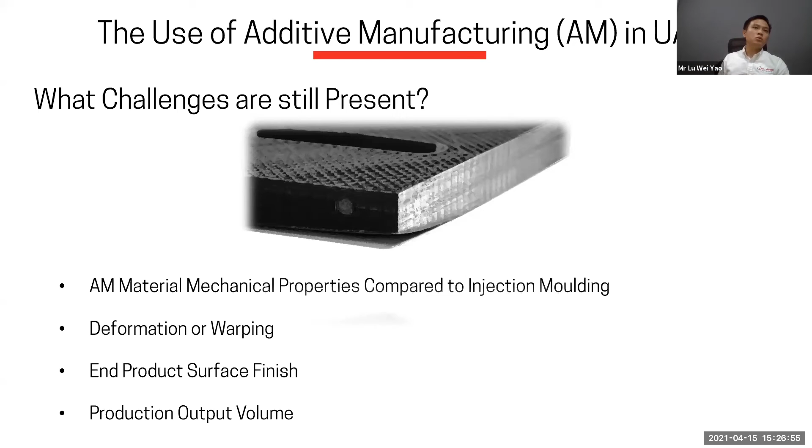So in summary, additive manufacturing designs are not optimized for injection molding, and vice versa. As such, it is key to identify the manufacturing processes prior to any design work, to really prevent any major redesign and delay.

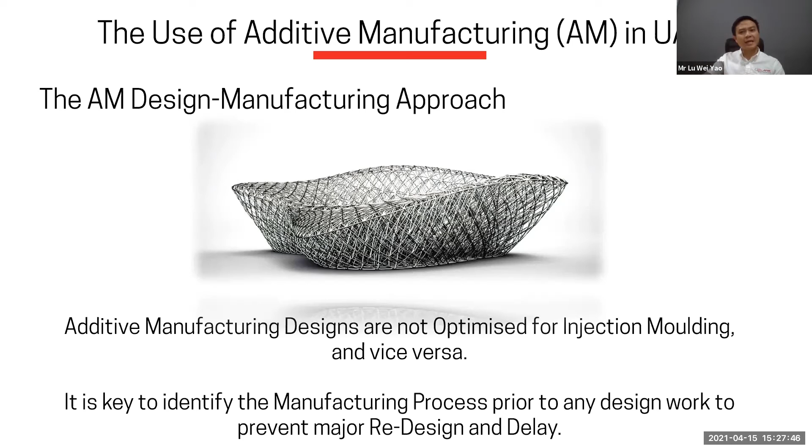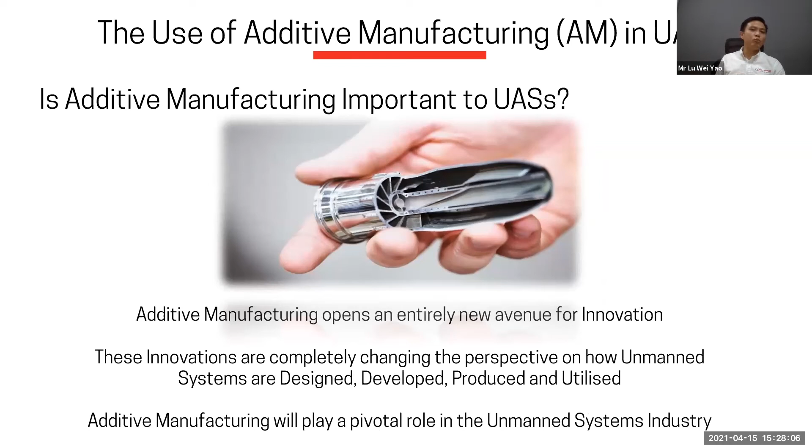Additive manufacturing opens an entirely new avenue for innovation, and these innovations are completely changing the perspective of how unmanned systems are designed, developed, produced, and utilized. We at Flare Dynamics feel that AM will play a pivotal role in the unmanned systems industry. Thank you so much for your time, I really appreciate it. Thank you.

Yeah, thank you so much. That was really very insightful. Good for us to find out all that's happening at Flare Dynamics.